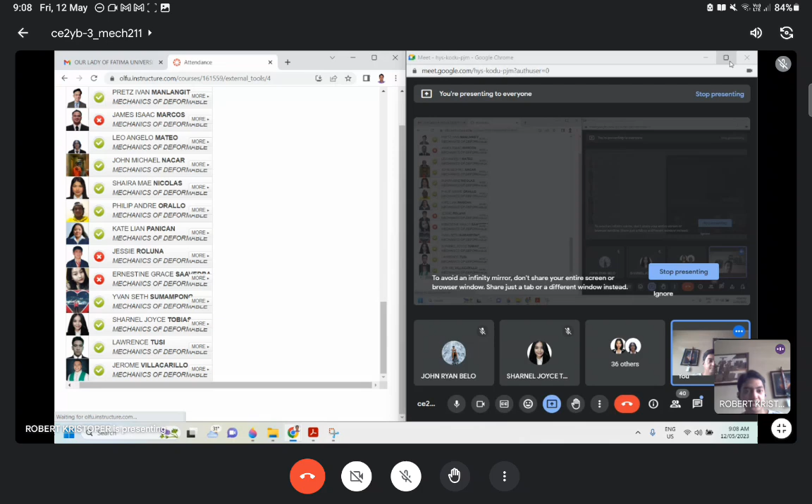Now somebody's asking me sa GC if merong points for the engineering week. What do you think? Wala po na lang, no? Actually I'm thinking about it kasi yung iba kong co-faculty naman is acknowledging the participation, giving some points. But again, with your participation, it does not necessarily mean na you're automatically pass the course. It's just maybe a point of addition to some low scoring activity. But again, there's no assurance - pag umattend kayo doon, you're already sure pass the course, di ba? So sige, I can give some points, but I'm still finalizing it, sa lahat naman ng courses ko yung mag-a-apply, lahat ng hawak ko na subject. So wala pang hindi ko pa pina-finalize kung ano man yung points, kung ilan or saan. But rest assured, if you join, meron din sa akin na additional points. The purpose naman is to somehow loosen up - hindi lang puro aral, somehow you can enjoy your stay sa school with that activity. Yun naman yung main purpose. But sige, since most of you are requesting for that, then I can give it naman.

Okay, so let's proceed with our agenda for today, yung ating discussion. Can you confirm, class, you are seeing my presentation here? Yes po, sir. Okay, I would like you to bring out your calculator already. And also listen very carefully, and kung merong question, feel free to ask kung nalilito kayo.

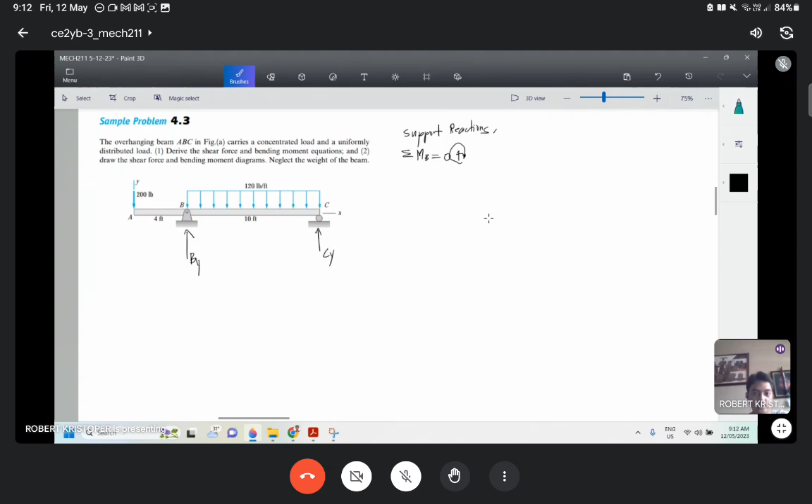Summation ng moment about point B, equals zero, positive clockwise for our equilibrium equation. So negative 200 times the moment arm of 4 feet, negative because it's counterclockwise about point B. Then negative Cy multiplied by the moment arm of 10 feet. And of course, the uniformly distributed load, plus the area.

That area is just the magnitude of our uniform loading, so that is 10 times 120 pounds per feet, the base times the magnitude. That's only the magnitude of the force. When we take the single concentrated load, the resultant of 120 pounds per feet, it will act at the center of this rectangle figure, so our moment arm will be 10 over 2, or 5.

Again, this area is the magnitude of this concentrated load, and this is the moment arm, 10 over 2, which is the location of the resultant of this uniform load. So equals to zero.

Can you give me the reaction at support C? You can speak right away. So, how much is this? 520 po.

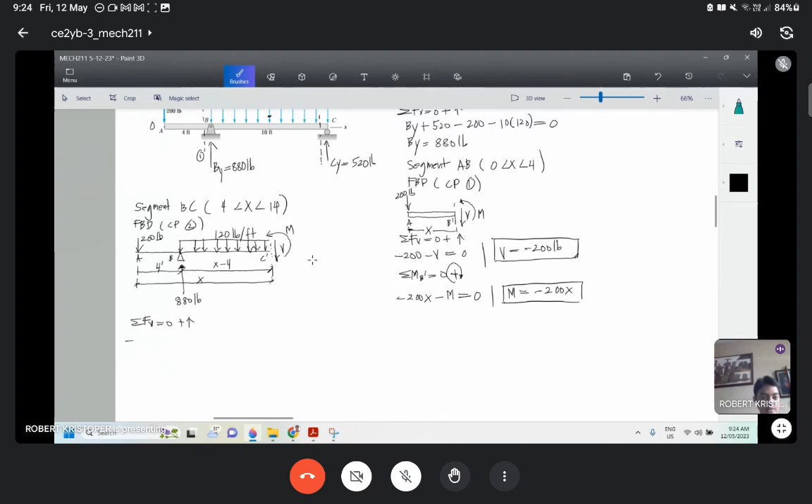Going upward is the reaction of 880. Going downward is this 120 pounds per foot. So minus, of course, the area of our uniform load. The area will be base times height, which is the magnitude of the uniformly distributed loading. So that will be minus, our base is x minus 4, times height, which is the magnitude of 120.

Is there anything else? Summation of forces: 200, positive 880, then the uniform loading, then of course this shear. So going downward is our shear V, shear force V. Forget, so minus V is equal to 0.

Now we need to simplify our equation so it's easy to use. So let's transpose this V to the left side, so it becomes positive. It is equal to this expression. Let's simplify: negative 200 plus 880, how much is that? Positive 600.

Positive 680, right? Then let's distribute this. So that will be what? Negative 120 times x is negative 120x. And then 120 times negative 4 is negative 480. Is that right? That's 480, so negative 480. Wait, negative 4 times 120 is negative 480, multiplied by the negative sign, so it becomes positive 480.

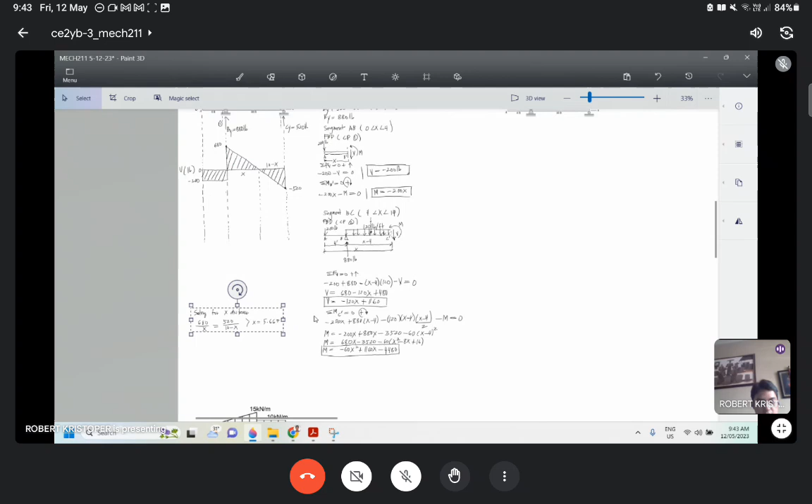Okay, so good. Now, after solving distance for x, then we are already ready to apply or use the moment equation. Okay, ibaba ko lang dito muna, mamaya ko na lang i-start yung solution. Okay, ano yung moment equation for segment AB muna? So unahin natin tong segment na to.

Okay, for the moment diagram, again, let's draw a horizontal line for the datum value of 0. So this is moment diagram, the unit is pounds feet, right? Now, do we have a moment loading here? Kung merong moment loading niya, let's say clockwise 20 pounds per feet, so positive yun, ang drawing natin pataas, di ba? 20 pounds per feet. Wala naman tayong loading or any reaction, so wala.

Okay, now mag-refer lang tayo sa ating equation. So ano equation? Negative 200x. Now class, for segment AB, kung yung value ng x is 0, syempre, di ba yung limit is 0 to 4. If x is 0, negative 200 times 0 is 0, so 0 lang yan, lagay lang natin dito 0. Then, of course, if x is equal to 4, then that will be negative 200 times 4 is negative 800. So negative 800, okay, ibaba natin dito.

Okay, so let's say this is negative 800. Now, at 0 degree, of course our first degree is straight, that's always 1. So if that's 0 degree, that's 1, so first degree ito sa baba. Okay, and that's for this segment.

Okay, let's check on our module, in case na may mag-review sa module. I just want to reiterate this one. Nasa na ba yun? Okay, if you will be reviewing on your module, ito yun. Saan na ba yun? Yes, ito yun. So ito yung ating parehas lang with our computation, kung mapapansin nyo.

Ito ba yun? Wait. Yes, ito. But what happened? Negative 800. Class, may mali ba ako na-isulat kanina with our... Tama ba yung nasulat ko dito? Can you check, sa dinictate ninyo? Using the shear equation, the moment equation.

Double check niya. Kapag ang value ng x is, ang tawag dito, what did I tell you? Ang value ng x is 5.667, or supposedly dapat yun ay 9.667. Ano sinabi ko kanina? Plus, what did I tell you kanina? 5.667. Okay, so that is our error, no? My bad. Kasi ang reference natin ng equation dito, ang reference natin ng 0 is from point A. So we all know this value of x is 5.667. So we need to add 4 here so that yung ating value ng x should be coming always from the 0 origin.

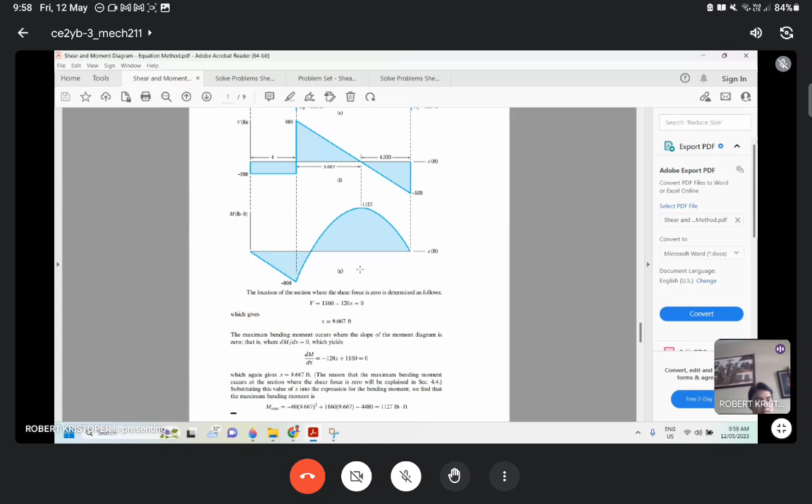Now, what do I want to emphasize here? On the equation, what's it called? On the solution of our module, we change the computation, not the equation. It so happened that using the equilibrium equation, the assumption is counterclockwise positive, but ours is clockwise.

But if you notice class, let's go back to one equation. Let's compare. This is his method, counterclockwise positive, this is the moment equation. Let's go to what I did. The moment equation is still similar. Either you assume the summation of moment is positive clockwise or positive counterclockwise, you will come up with the same moment and shear equation.

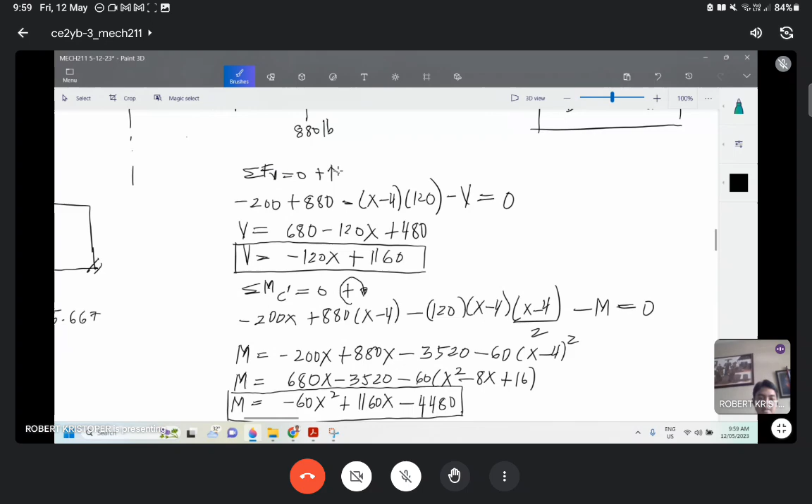For the shear equation, it's the same, positive upward is the positive direction. That's what I wanted to emphasize, but that is our method.

Now, let's do the much easier method for drawing the shear and moment diagram for the beam. That is the area method. This is faster, so let's speed up solving this.

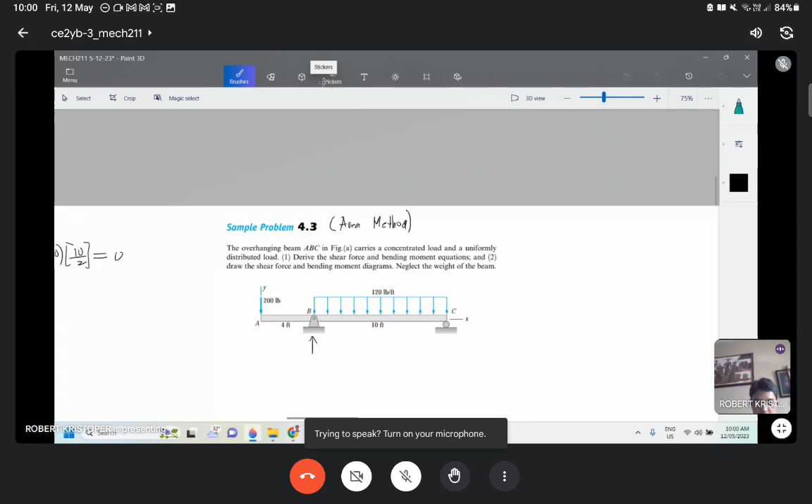Area method. I'll just add the reaction since we already solved that earlier. So that will be 880 and 520 pounds. Now upon solving the reaction, you can already proceed with drawing the shear and moment diagram.

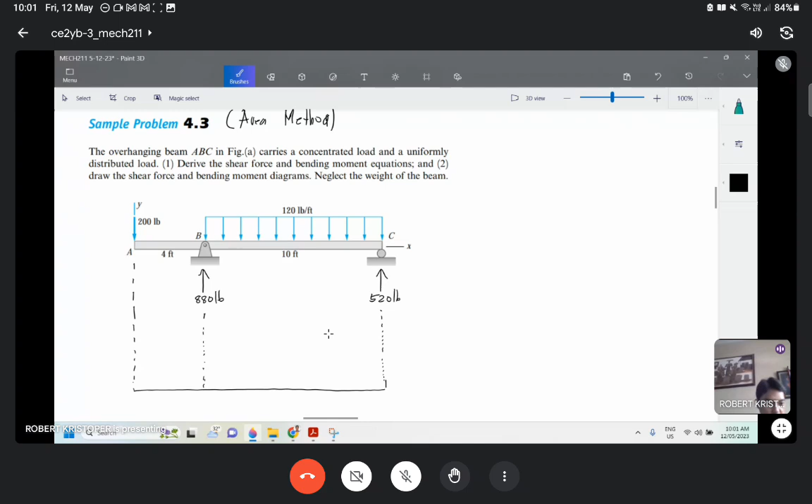So of course, how is this drawn? 200 pounds means downward, so negative 200. Just follow the drawing. Then we have no other loading here, so it's continuous until just prior to point B.

Now, we're still at negative 200 here. Then we have a force upward for the reaction. So negative 200 plus 880, that is positive 680. So we go up here by positive 680.

Quickly now, positive 680 minus 10 times 120. How much is that class? 680 minus 10 times 120, can anyone give me that? Negative 520, sir. Okay, negative 520.

So approximately, let's say negative 520. Again, this is the shear diagram, unit is pounds. So if negative 520, this is a zero degree curve, so this is first degree, straight line when we connect the values.

So negative 520, then of course we have a reaction going upward, positive. So negative 520 plus 520, that goes back to 0. So this is our shear diagram.

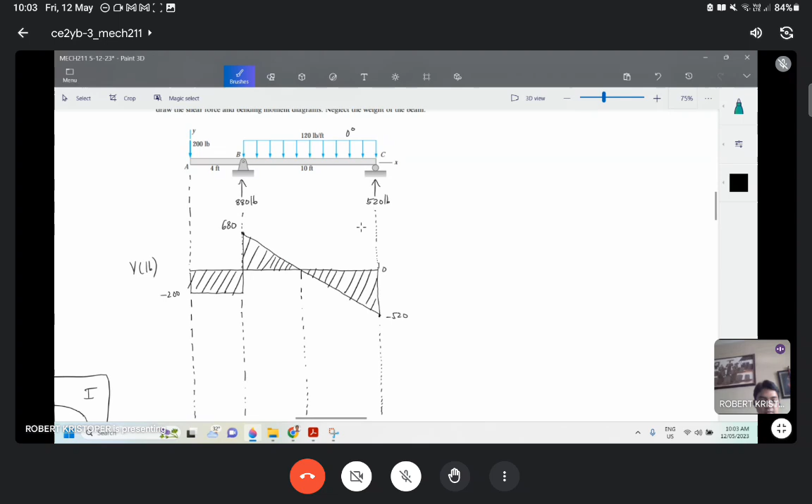For the moment diagram, let's continue. So, drawing again our boundary lines on our graph. Again, this is for the moment diagram. So M, the unit is pounds-feet. And again, our reference for the horizontal datum is 0.

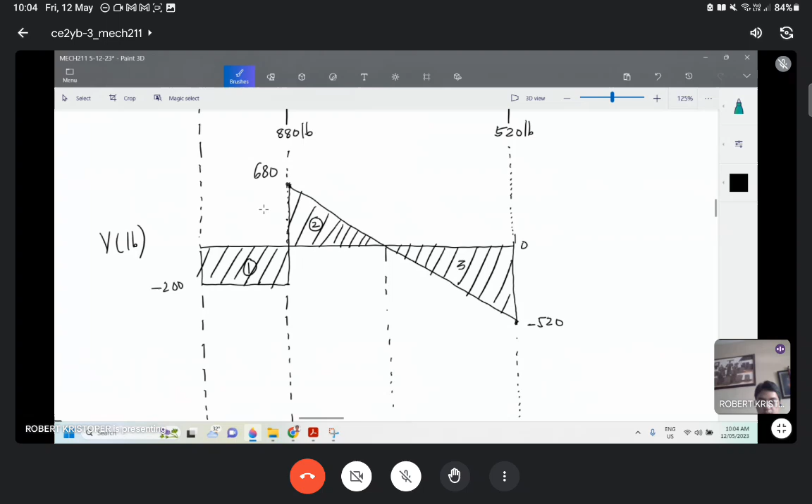Now, we have no other loading, no moment loading, so there's no addition per segment boundary. So we just need the areas. Let's say area 1, area 2, then this is area number 3. Let's complete the areas.

So area 1, what area is that? Area 1 equals base times height. What's our base here? 4 feet is the dimension. So 4 times 200. Let me put the sign so we can continue adding later. So A1 is simply 200 times 4, that's 800, negative.

And area number 2, since I won't solve this again, this distance we already computed earlier by applying similar triangle, that is 9 point... x computed earlier for this one is 5.667, right.

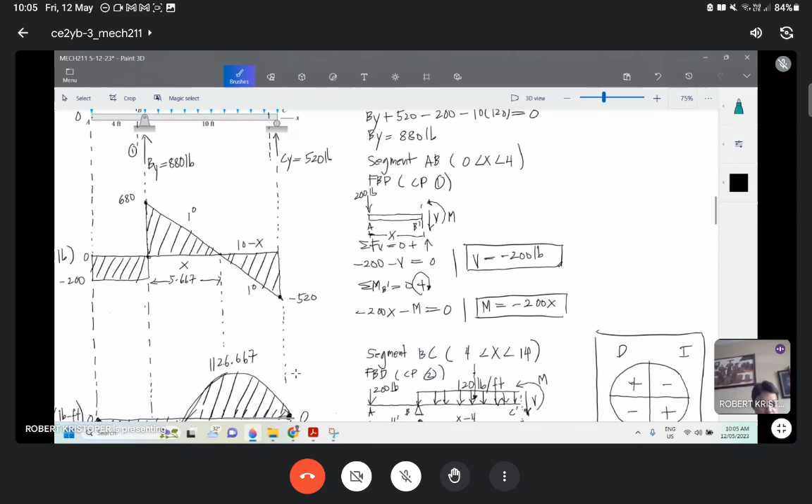So, 5.667, tama ba? Yes, 5.667. Let me review this, class. Again, let's pick this view. Mahirap mag-set ng screen view dito sa online class. So, 5.667.

Itong kabila, ilan to? Siyempre, 10 minus 5.667, that is 4.333. Now, for area 2, itong triangle, positive na.

1/2 base, 5.667 times the height ng magnitude na 680. Ilan to class? Anyone?

For area 2, nang pakibigyan na lang. Yung area 2 po ba? Area 2. 1126.78 po lumalabas. Ay, hindi sir, wait lang po, minus ko na pala agad. 1926.78. Okay lang na, 78.

Now, for area 3. Ang ginawa niya is kino-compute niya na ng tuloy-tuloy. So medyo advanced na yung nagpa-participate. Sino nagpa-participate na? That's good for you.

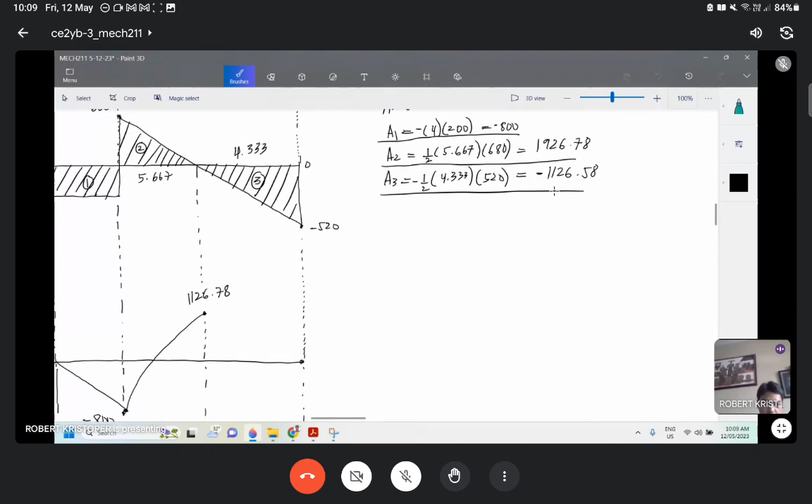And of course, finally, 1126.78 minus 1126.58, meron tayong konting discrepancy. Okay? So, but it will go back to approximately 0. No? 4.333 times 520, so meron tayong discrepancy. That's on the rounding up. So, pero close to 0, approximately 0.

Okay, don't worry as long as tama yung procedure na computation. I'm also considering yung mga minimal discrepancy pagdating ng final closing ng inyong shear and moment diagram. Okay, so this is the shear and moment diagram. Then we can already finalize, no? Therefore, the maximum moment is 1126.78 pound-feet, and the maximum shear is positive 680 pounds.

Okay, so I guess same lang ng ating shear and moment diagram, no? Same result, okay, with different method. So happened that naka-equation kasi tayo dito, so somehow merong magiging variances talaga in our computation. Pero sobrang close yan, sobrang malapit.

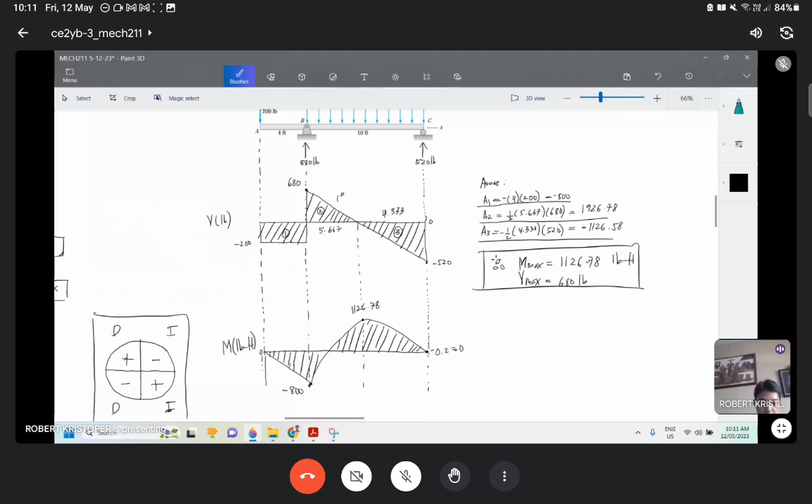Okay, so let me just put a first degree curve and a second degree curve here. So again, nadadagdagan ng class na from the loading 0 degree plus 1, magiging first degree sa shear, then magiging second degree sa ating moment diagram. Okay, so that's it for our first example.

And okay, I'm thinking if we need to show this one to you, or we need to solve this one in detail. Okay, pwede natin skip dito yung equation method, I guess.

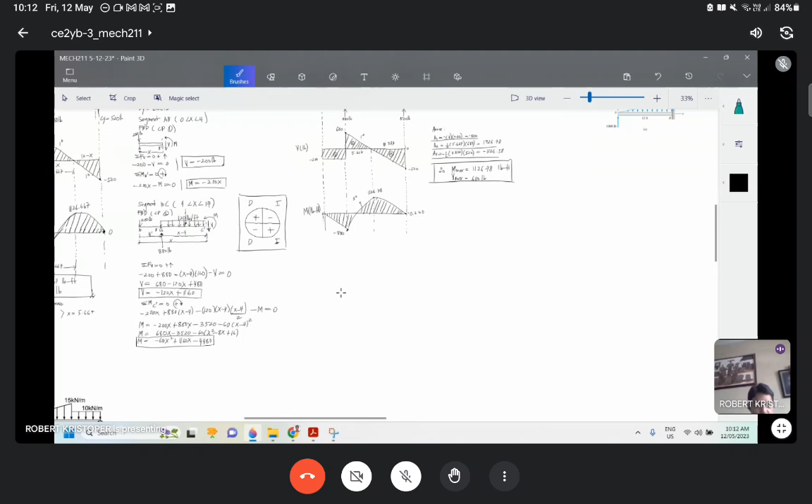Then we will proceed with this one for both equation and area method para meron tayong mga ganitong example for you, no, kasi yun lang naman yung mga complicated loadings, no? Sige, what do we do? Okay, sige, gawin natin, kasi meron naman to sa module new class, no? I-discuss ko na lang muna equation method here. Nasa mo yan? Okay, then we do the area method, okay? For that example. Para makapag-moving load agad tayo, no?

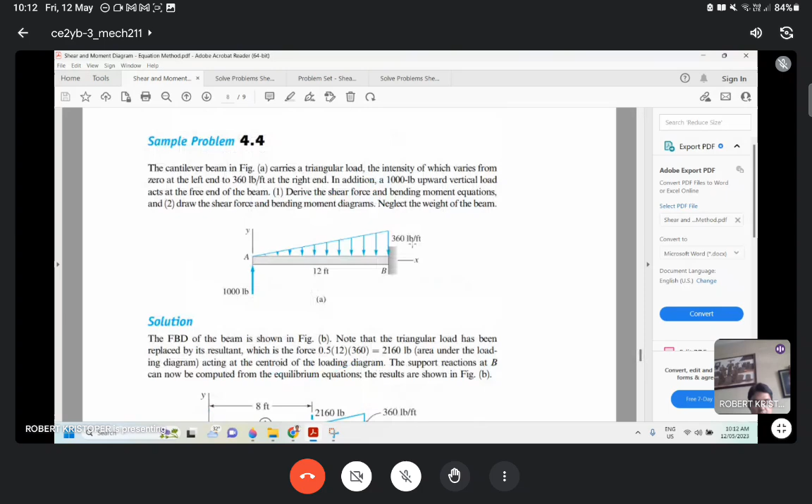Class, are you with me with this one? Sample problem 4.4. Class, are you with me with sample problem 4.4 already? Yes sir. Okay, so what we have here is a cantilever beam.

So if it's a cantilever, it's free at the end with no support, and there's a fixed support. When we say fixed support or rigid support at the end, we have three reactions: vertical reaction, horizontal reaction if there are horizontal forces, and a moment.

This force of 1,000 pounds is not just a reaction, it's an additional loading. There's an additional point load at the end of the beam or at the free end of the cantilever beam. It carries a triangular load with magnitude varying from 0 to 360 pounds per feet.

And in addition, there's a 1000 pounds vertical load at the free end of the beam. So we need to derive the shear force and bending moment equations, and draw the shear force and bending moment diagrams, neglecting the weight of the beam.

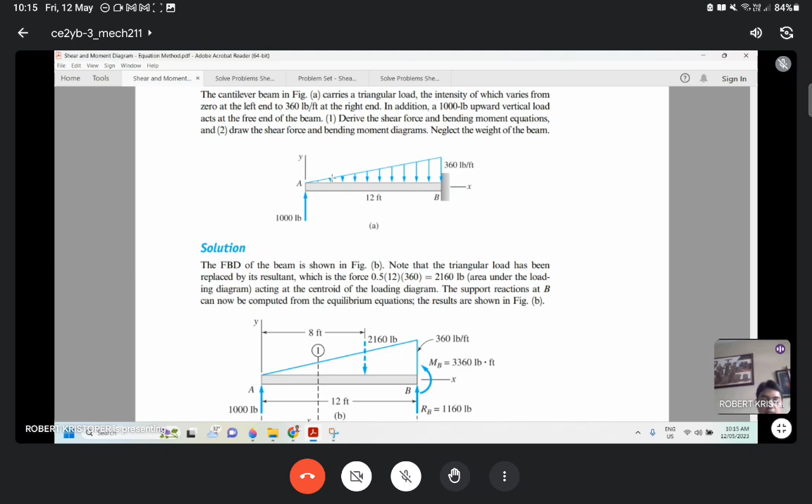What do we do? We impose segments. But here, we don't need to segment because within this span, the loading is continuous with no discontinuity. So that's what we'll see within AB - we won't have additional segments.

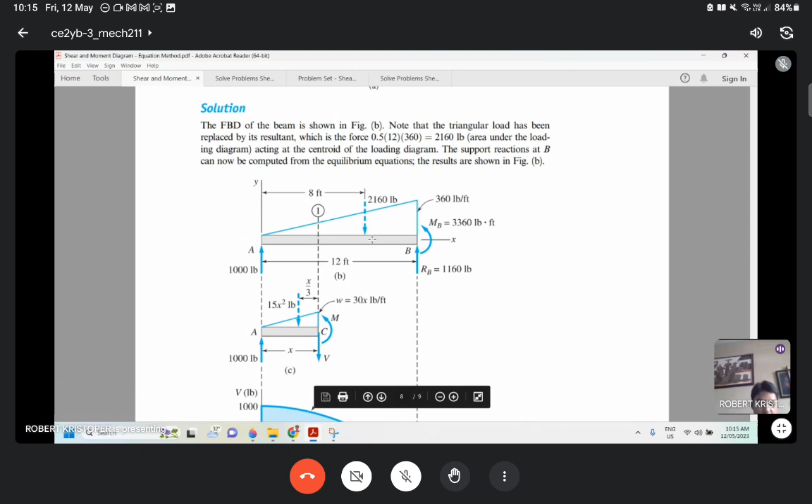So with cutting plane 1, what do we see? Again, the same thing - the shear and the moment. The shear is in the positive direction and the moment is in the positive direction - the beam is smiling.

Class, how do we come up with the equation? After getting the cutting plane, we see the shear and moment. We need to represent the distance from the origin to the cutting plane as distance x. Now class, with this triangular loading from 0 to this point, we don't know what this magnitude is - we know the total is 360 pounds per feet.

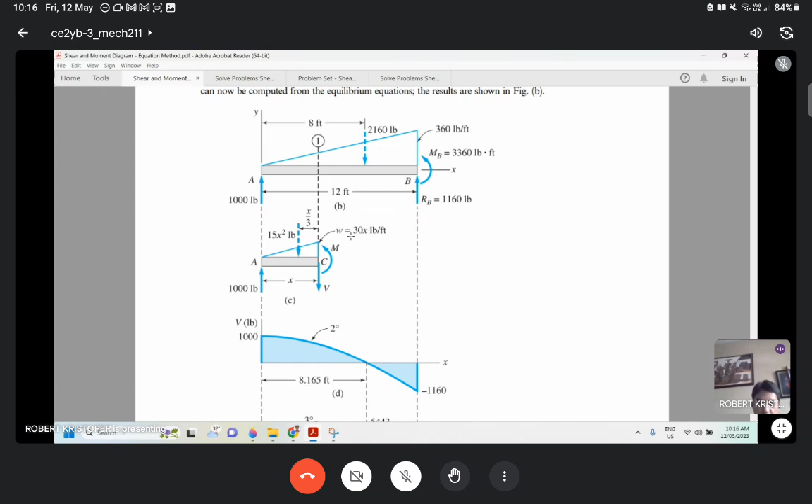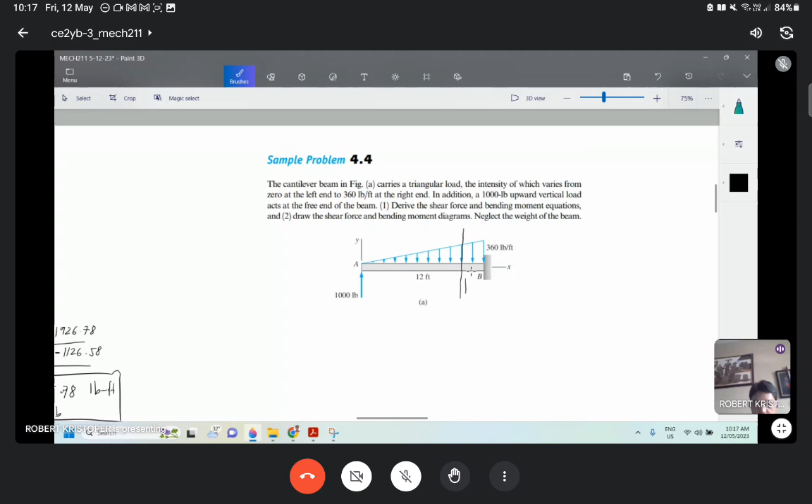So here it is, class. Upon the cutting plane - let's say that cutting plane from earlier - of course you'll see shear and moment, and distance x.

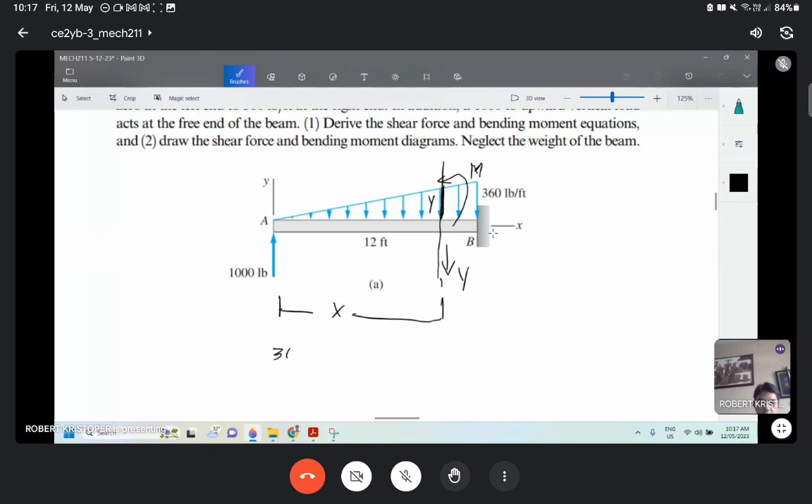Now class, at this point we don't know the magnitude of the uniform loading, so let's represent it as y. Using similar triangles, we can relate that in terms of distance x. So the total triangular loading, 360, divided by the side distance of 12, equals y - that's the magnitude of the uniform loading at this cutting plane, all over x.

So what you get is y equals 360 over 12, times x. 360 over 12 is 30. That's why, as you can see, the magnitude was 30x earlier. That's simply the uniform loading magnitude at this point, in terms of the equation 30x.

Okay, so going back to the solution in your module.

Okay, 30x siya makikita nyo. And plus, syempre, if you are to represent a single unit load for this triangle, di ba? Area lang naman yun no? Ng triangular loading, that is 1/2 base x times this magnitude. So 1/2 x times 30x, it will give you what? 1/2 ng 30x, that is 15x times x, so x squared. So 15x squared yung single unit load na yun. And it is acting, of course, at the center of the triangle, which is x over 3 on this side and 2/3 ng x naman on this left side.

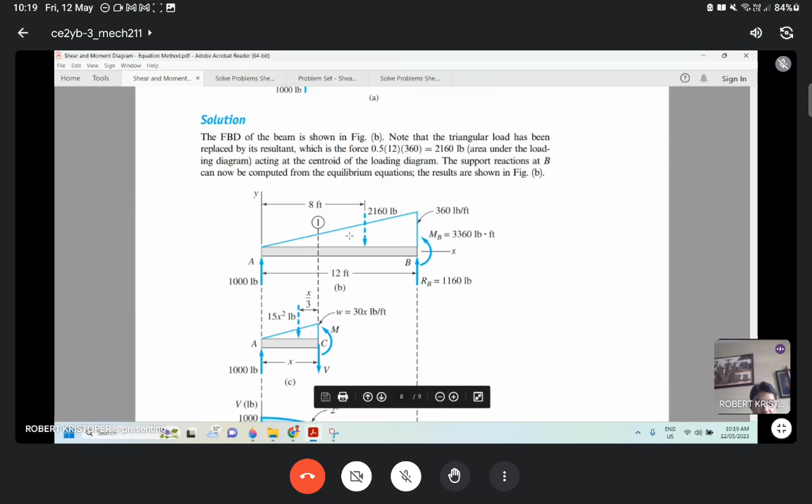Okay, but since we are taking a moment here, then ito yung kukunin natin ng moment. So after that class, you will be coming up on this equation for shear and moment. Isa lang yan kasi isang segment lang.

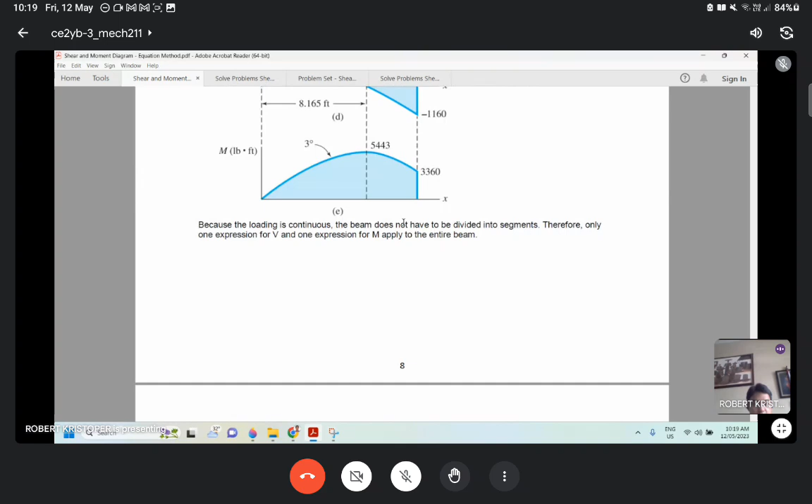Okay, so for the shear, nag-sum up lang, no? 1,000 yung end load, yung load sa dulo, no? And also this unit load here, yung resultant ng triangular loading. Okay, and what else? For the moment equation, take na kayo ng moment at this point, yung cutting point. So 1,000x yun, and then 15x squared multiplied by x all over 3.

So simplifying those equation, makukuha nyo pa rin yung moment equation na to. And again, same method lang to draw the moment diagram, then apply nyo lang yung ginawa natin kanina. Magbigay kayo ng value ng x on our shear and moment equation, and until maplot ninyo yung complete diagram.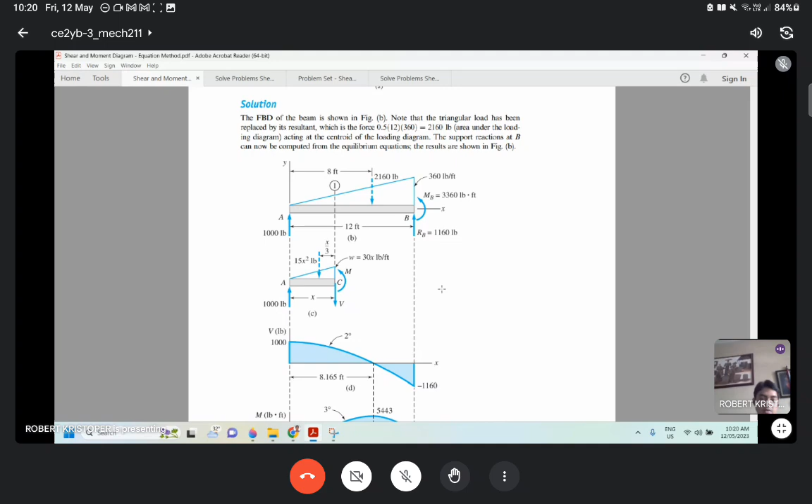So, the difference is that, class, dito yung solution na you just need to review. The difference lang on this method is that yung moment equation is positive counterclockwise on the equilibrium equation sa module, pero sa atin is positive clockwise. But still, that will yield to same shear and moment equation naman. Okay, so i-recheck natin itong value na itong graph na to and yung mga values using area method naman.

Okay, so yun na lang yung solve natin with this one. Now, burahin na natin to, dito na lang mag-drawing sa kabila. Okay, applying area method now for this problem. Class, are you with me with this sample problem 4.4 using area method naman?

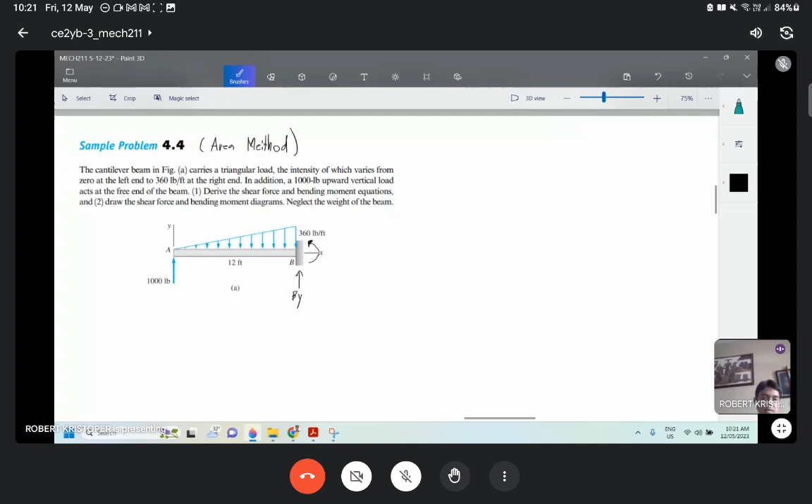Okay, so area method, again, with the rigid support or fixed support at the end. Okay, anong reaction na meron tayo? A vertical reaction, may horizontal reaction yan supposedly, pero zero yan since walang force horizontal. So B sub y lang to. And of course, we have a moment reaction at the end support. So again, assume direction lang to. Okay, so M sub B.

Now, let's compute support reaction. Okay, summation ng forces vertical equals 0, positive going upward. So that will be By, okay, plus itong loading na upward 1,000 pounds minus, of course, okay, itong triangular load. So the magnitude, the single unit load will act at this point, approximately, sa center ng triangle. But yung magnitude nito is, of course, the area, which is minus 1/2 times base 12

times 360. Again, this is just the magnitude. With this one, yung area, we need to multiply by, okay, we're taking summation of forces pala. Natin kailangan ng moment. So summation of forces, By plus 1,000 minus 1/2 times 12 times 360. Okay, is equal to 0. So By is equal to, ilan to class?

Go ahead, kung may na-complete na. Ilan to? Anyone? Go ahead, ilan? 1160. 1160. Okay, so By is 1160. And then, of course, ano yung unit natin dito? Pounds and feet, so pounds.

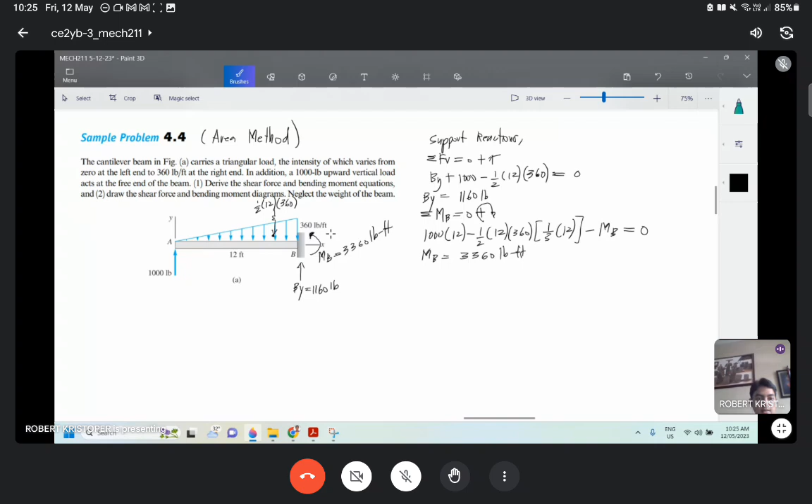Okay, so now with this one, we are ready to compute and draw the shear and moment diagram using the area method. With that, how do we do it? There's only one continuous loading in this span, so we don't need to increase the segments for discontinuity. Let's just drop down the span.

Okay, then again, this is for the shear. Unit is pounds. Okay, 0 for our reference datum. Now, do we have any shear here, or any force? Yes, 1,000 pounds, going upward. This is 1,000.

And of course, there's the area of the triangle. So, 2,160 of course downward due to the loading, minus that from our loading. So, 1,000 minus 1/2 times 12 times 360, how much is that?

Anyone, how much? Negative 1160, sir. Okay, negative 1160, that's correct. So, negative 1160. And of course, that will return to 0. Negative 1160 plus going upward, 1160, so it will return to 0.

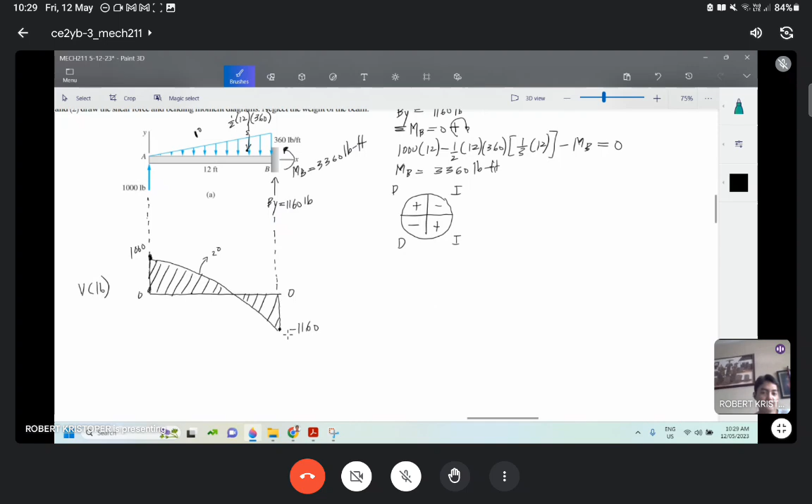So this will be first degree, and obviously this will be a second degree curve or a parabolic curve. Okay, let's shade it to emphasize the boundary of the area. Okay, now this is the area we will reference for drawing our moment diagram.

Okay, so with that, let's add labels. Now, this is area 1, area 2. Now, how can we compute for area 1 and area 2? We need the distances, because we have a discontinuity or a segment here. So what is the value of this x? Of course, if you set the value of x, the other side would be 12 minus x, right?

So how can we resolve this? If it's second degree, we have a parabolic curve - a parabola is a second degree curve. With that, we can apply what we call the square property of a parabola. What's the formula of a parabola? x squared equals 4ay. And if the axis is on the other side, y squared equals 4ax. What parabola do we have here? This is the half portion of the parabola, and supposedly if you complete it, the other half is on the other side.

So we have here the apex, the point where inflection occurs - the point of inflection, mixing up engineering economy and mechanics terms - where there's zero slope, we have zero magnitude for our loading. So that's our parabolic curve, and this is our axis of symmetry. That's why our equation has x squared - applying the square property of the parabola. How do we apply this to solve for x? It's similar to ratio and proportion in a triangle, using similar triangles, but this time we consider the whole parabola.

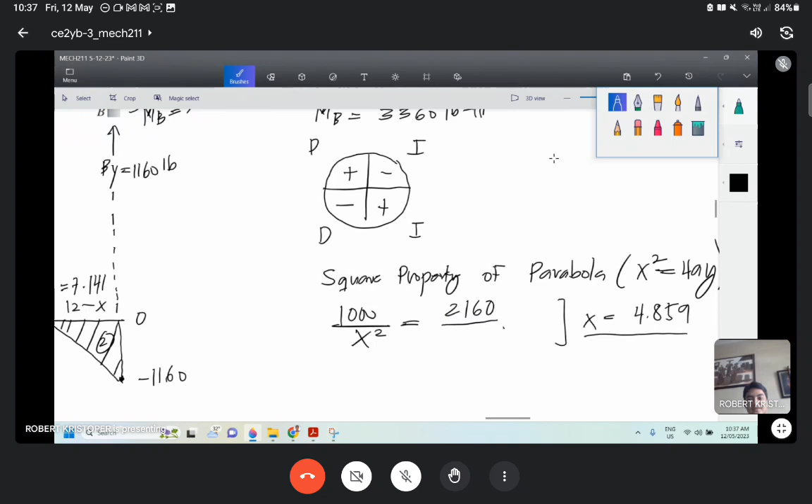Okay, ito yung naging mali ko pala, class. Kindly, okay, ito siya. Inassume ko siyang triangle, my bad. Okay class, ito siya, tapos sa triangle dito. Okay, ito siya. No, this should be 12.

Kasi we are referencing at this point as the origin. So yung ating distance from this axis of symmetry is, of course, x for this one. Then 1,000 yung ating magnitude, then 2,160 for the total. Then yung x distance, this should be 12, no? Then, of course, we square this one.

Can you give me the value of x nga? Napasarap sa triangle. Ilan na yung value ng x here? X. Yan. Okay, can you give me the value of x here?

Kapag ito na equation, 1,000 squared. 1,000 all over x squared is equal to 2,160 all over 12 squared. Kailan na ito, class? Can you compute? This should be around 8 point something. 8.165. Okay, so tama na to this time around.

Napasarap sa triangle na. Okay, for the parabola we have to consider the whole curvature na on our equation. Okay, so 8.165. Okay, so kaya pala hindi siya nakaano sa ating... ang tawag dito, hindi siya proportional. Okay, so 8.165. Okay, x is equal to... wala.

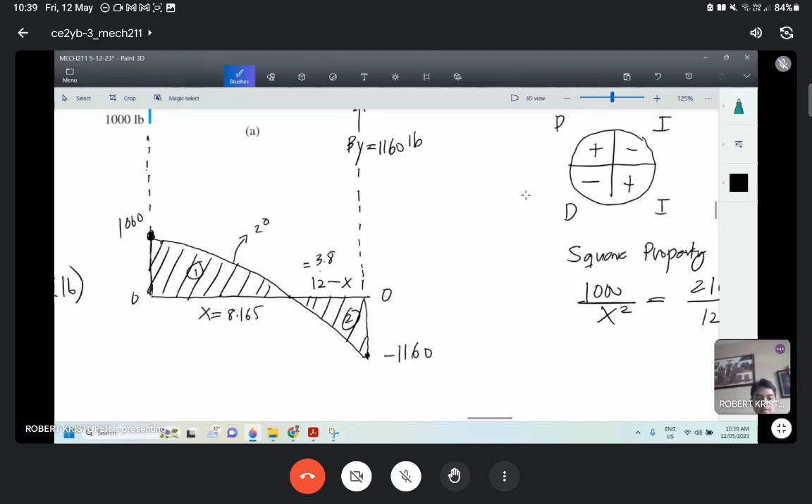So 8.165. Now, of course, 12 minus x, that will be 3.835. So this will be 3.835 for the distance. Now, we are ready to solve the areas.

For the areas, how can we do it? Ano yung formula ng spandrel? That's 1 all over n plus 1, where n is the degree, then base times height. Okay, so what do we have here? Areas.

Okay, for area number 1, di ba we all know that this portion ng area... lagyan ko lang ng almost hidden line. So di ba with this one, ito yung area ng rectangle, ng kabuuan. So that area minus this area ng unshaded region is equal to this area 1.

Okay, so with that, can I write this one sa official equation? That will be what? Area ng rectangle ng kabuuan, that will be base 8.165 multiplied by the magnitude nito, which is 1,000.

Minus itong area ng unshaded region. Ang ating unshaded region is spandrel, second degree spandrel. At dahil second degree yan, ang ating factor is 1 all over n plus 1, so add tayo ng isa, 1/3. So 1/3 base, ano yung base natin? Yun pa rin naman, yung 8.165, times height na 1,000.

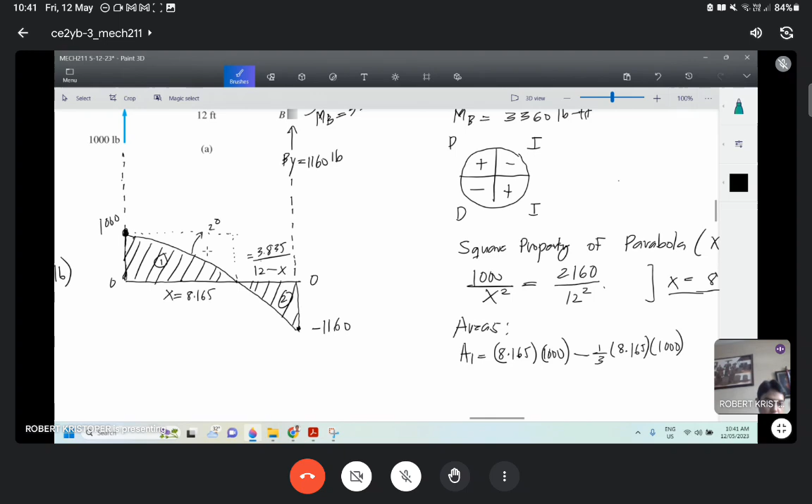For the other way around, kung alam niyo 1/3 tong portion na to, edi itong kabilang side is 2/3. So area 1 is 2/3 base times height lang. So that's the other way around.

Pero just to emphasize our solution, ginawa ko na ganito. Ilan yung class? 8.165 times 1,000 minus 1/3 ng 8.165 times 1,000. Ilan to class? 5,000? Parehas lang ba? 5,443.33. Same lang?

Yung na-complete na. Same? Can you confirm before I proceed? Guys, can you confirm? Same? Yes po, same lang po. Okay, so now this is for area 1.

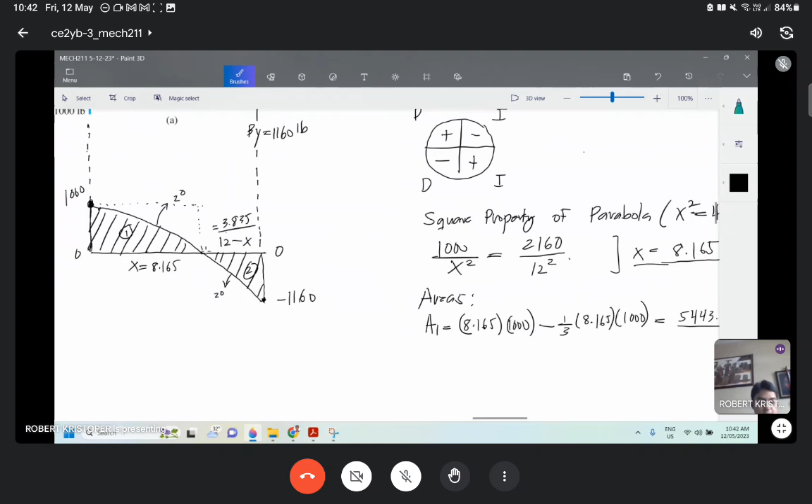Then how do we solve area number 2 naman? For area number 2 class, we cannot apply, kasi parang, is this a spandrel naman? Then we can just simply apply yung formula na 1/3 base times height. But in this case, hindi siya applicable, since this is not the apex of our parabola or our curve. So we cannot apply that equation in particular. Hindi rin yun yung magiging apex on our parabola.

Okay, hindi natin siya ma-apply yung area na yon. Ang kailangan natin gawin is that we consider this whole parabolic segment in order to compute for area number 2. So syempre i-isolate natin itong buong parabola. I-isolate ko muna yan.

Okay, so this is 1,000. This is 1,160. Okay, ito siya class. If we consider the whole parabola, then we can consider a full rectangle, isang malaking rectangle. Anong dimension ng malaking rectangle? Of course, that will be ito ay 12. At itong kabuuan na to is in total, that is 2,160.

Okay, now again this is area 1, computed kanina, meron naman tayong value na. Then area 2 is unknown. In order for us to compute for area 2, ang pwede natin gawing consideration dito is itong area ng kabuuan ng rectangle, itong kabuuan, minus itong area na to.

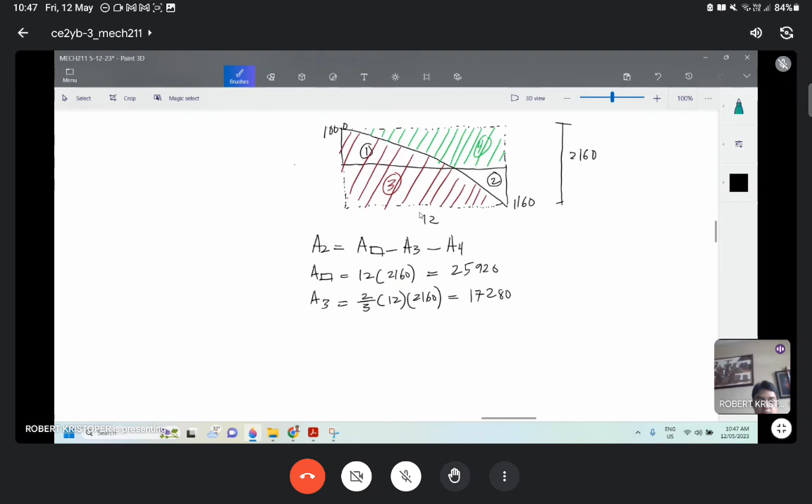Ilan to class? 17,280. Parehas, no? Parehas lang, so nung na-compute ko din. So area 3, anong ulang na lang? Area 4 na lang. So area 4 will be, paano ito makukuha class? Diba, we all know that area 1 kanina, computed naman natin kanina. Area 1 is 5443.33. So kailangan lang natin i-minus ng area 1 sa kabuuan nitong upper rectangle. Within yung upper rectangle, ang dimension is 1,000 by 12.

So that will be area 4 is 1,000 times 12 minus area 1. Ano yung area 1? 5443.333. Ilan to class, for area sub 4? 1,000 times 12 minus 5443.333. 6556.667.

Now we are ready to substitute the values. So area ng malaking rectangle is 25,920 minus 17,280 for area sub 3, minus 6556.667. So ilan to? 2,083.333. Go ahead if you have the answer.

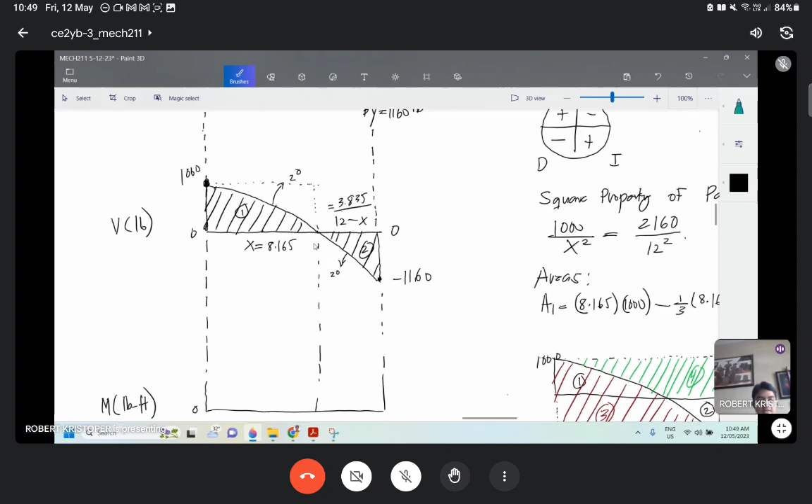So for area 1, what do we have? What is the magnitude? It is 5,443.33. So the moment at this point is 5,443.333. Now, what does our graph look like? Is it like this or like that? Again, we have no moment loading at the top, so it's zero here.

How do we draw that? Is it like this or like that? Let's refer to the DT. Again, this is positive for the graph, since it's above the horizontal line. So positive, and this is decreasing. So decreasing positively, decreasing positively. Okay, that's it.

5,443.333. So for area sub 2, this is negative, so we need to subtract this magnitude. Or if you want, under the solution, put it in parenthesis to indicate a negative value for the area. So it's still negative. 5,443.333 minus 2,083.33, how much is the class? 3,360. Okay, correct, 3,360.

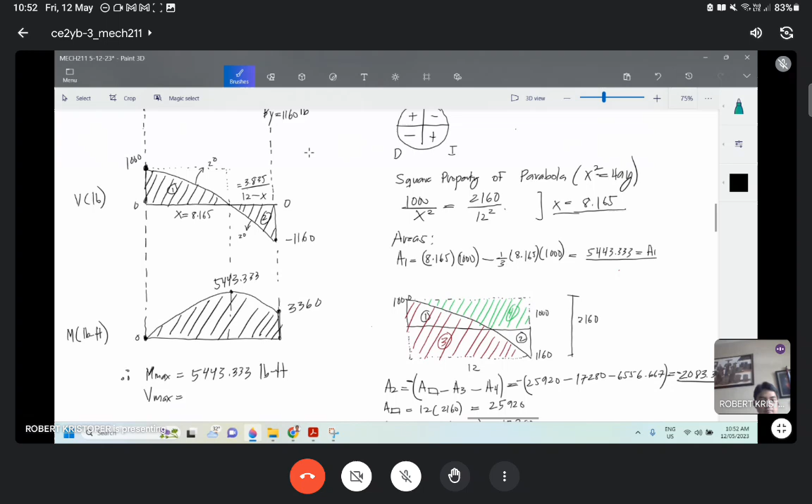Now, therefore, the maximum moment is 5,443.333 pound-feet units. And the maximum shear is, what do we have here? Negative 1,160 pounds is the maximum.

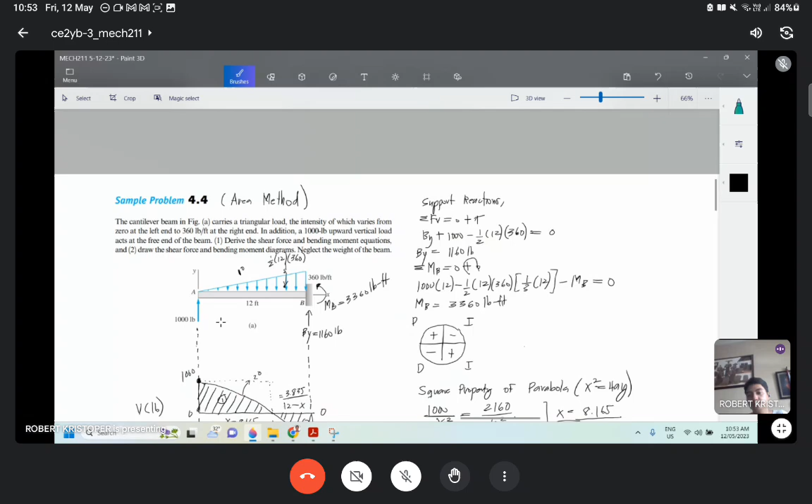So can we check this result against the equation method in the module? I think it's the same. Yesterday's value was 5,443. Same result. So the maximum shear is negative 1,160. Same with the result using the equation method. This is also called the area method. Okay, let's save this one.

Okay, supposedly class, I still have another one to discuss, also called by another name, as an example before we proceed to moving loads. But I think we need to go to moving loads already. What I will do is just send you the solution for this one, both equation and area method, so you'll have an additional example. But basically you have your module with a lot of solved problems. If you want to check, there are solved problems there.

Okay, in your module, just take time to review. But of course, it's not just review — I encourage you to solve it on your own and then verify the result here. And again, in your module, the difference might be in our assumption of positive and negative direction for the equilibrium equation, the summation of moments. That's the only difference, but the rest are all similar. You saw the cutting plane, the assumption there is similar to our positive direction. Positive moment when the beam smiles, positive when it rotates clockwise. Kindly check all those examples.

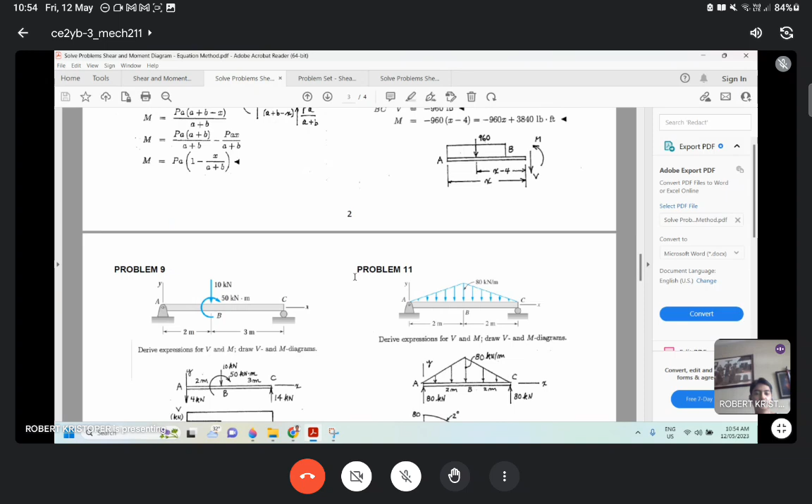Okay, other than this example that I will be sending to you, so we can proceed with the moving load topic already. As long as you know the concept, you won't get lost with the procedure. Now class, before we proceed to the moving load topic, let me show you some example here.

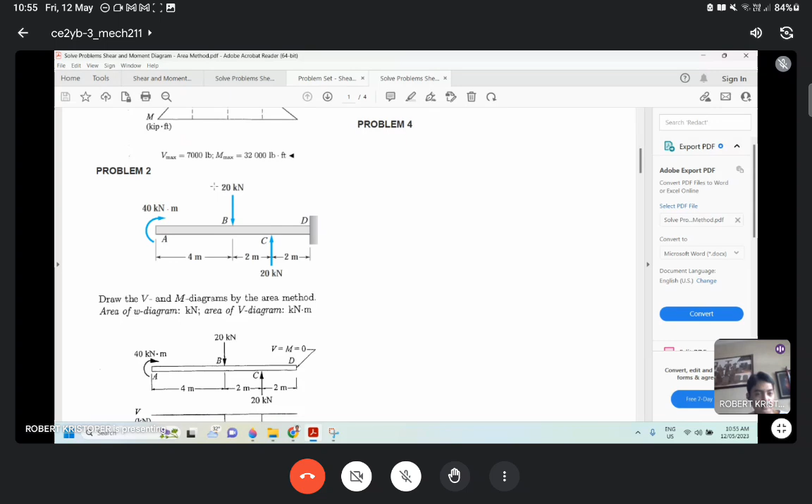Class, are you with me with this problem number 2 on your screen? Yes po. Okay, so this is actually a solved problem using the area method. Again, you have to solve the equation for the reactions, then you can draw the diagram. So for the shear here, if you notice, do we have a force here at this end segment?

Wala naman, di ba? So flat pa yan until this point B. Ngayon, bigla nagkaroon loading na 20, so bumaba ng negative 20. Then until prior point C, negative 20 pa rin yan. But pagdating ng point C, meron tayong support reaction na 20, so balik sa 0, negative 20.

Now for the moment diagram, kung mapapansin nyo class, if there is no loading na moment on our beam, then lagi nagsisimula naman sa 0. But in this case, if meron certain value ng moment, kahit pa yung sa segment B or C or at A, what we are doing is parang point load lang, taas baba lang yan on our diagram.

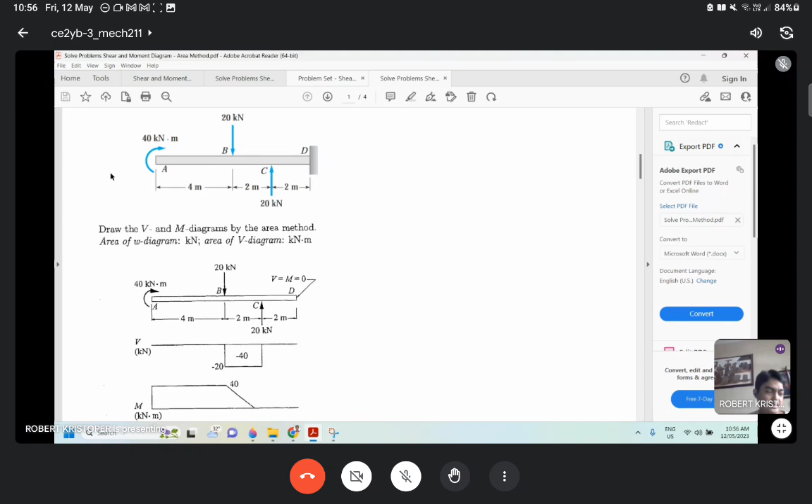So in this case, this is positive 40 kilonewton on our assumption sa equilibrium equation. Positive means clockwise means positive, that is why ito ay positive on our graph. So tumaas siya ng 40 in magnitude.

Now do you see any loading? After nyo mag-graph to, for the 40 kilonewton meter, refer to the shear diagram. Do you see any areas here that will change the magnitude of 40? Wala naman, di ba? So continuous yan until at this point.

Now at this point, at point B, 40 kilonewton meter pa yan. But of course meron tayong 20 kilonewton to change itong loading to change the moment diagram. So from 40, again, take the area ng ating shear. So 40 minus 40, it will bring back the value to 0.

Okay so 0 na yan, then are you seeing other areas here after this point? No, hindi pa nga ito pantay, dapat pantay to here. Okay so 0 yan, then until this one, 0 yan. So we don't have any area under this particular shear diagram.

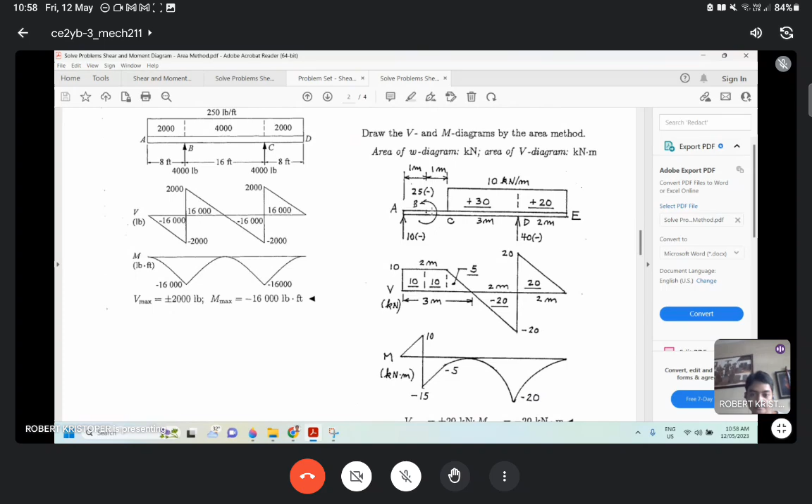So what I'm trying to emphasize is that pag nakita kayo ng moment loading, ano nangyayari? Kuha pa tayo ng example dito. Here with this one, may moment loading here, or there's a couple of loading. Anong nangyayari dito? We have a 25 kilonewton meter.

Now for the moment diagram, the area of this one, class, are you with me muna for problem 8? Sige nga, for problem 8, are you with me? Yes problem po. Okay, so for problem number 8.

Upon solving the support reaction, mag-drawing nyo naman yung shear diagram. Then for the moment diagram, siyempre you check the loading, wala naman tayong moment here, so we just simply refer to the area ng shear.

So the area ng shear is, of course, that will be what? 10 yung magnitude, and then yung distance is 1. So 10 times 1 is 10, so that is why 10 yan. And then first degree, 0 degree pala, then first degree to, so 10.

Ngayon, we have a moment loading na 25 kilonewton meter counterclockwise. Counter means negative, so that will be what? 10, mababawasan siya ng 25. So 10 minus 25 counterclockwise, negative 15. That is why nagkaroon ng drop down here.

So kung clockwise positive, ano mangyari sa ating moment diagram? Pataas naman yun doon. Then bago nyo consider itong sunod na mga areas here.

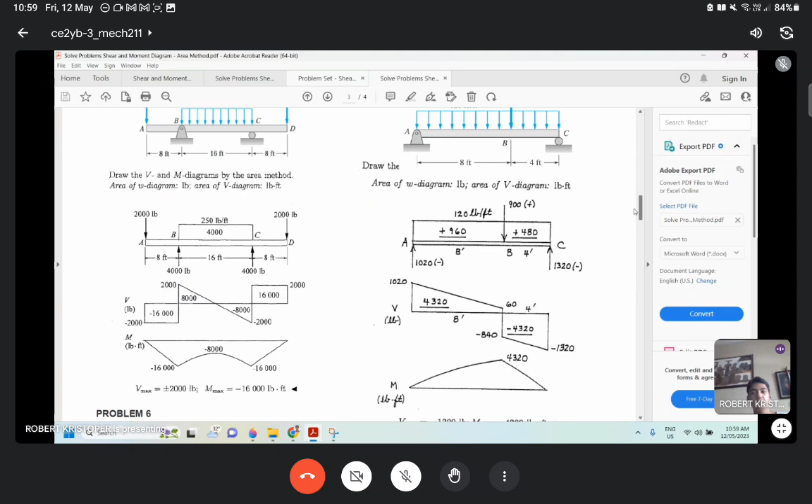Okay so class, this is it for your practice. I-check nyo yung mga sample problem here, then apply our core concept. Ang importante lang naman din, alam niyo yung core concept din.

Compute for the reaction, kung equation method yan, take the segment, complete for the draw the free body diagram, take the moment and shear equation, then plot the diagram. Wag lang kayo malito doon sa how to draw, using yung ating guide na DIDI, for positive and negative values, how can we connect the datas on our graph?

Okay, so now we are up to the last topic for the day.

For the last topic, class, this is all about moving loads. Pero we discuss this one very briefly lang, kasi ito yung madaling topic lang naman. I would say, kung masusundan ninyo yung flow ng discussion, but of course, kindly listen attentively.

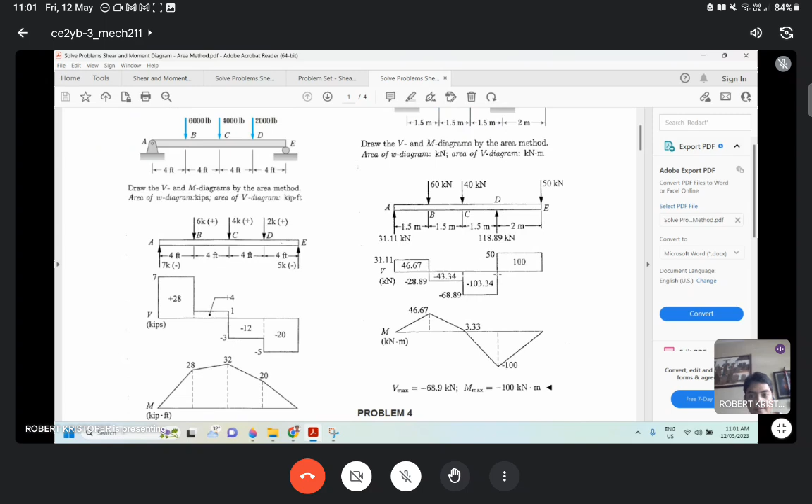Okay, mag-observe pa tayo dito. Ano pa yung may mga loading lang ng mga unit load. Okay, so meron pa ba dito? Okay, how about sa kabila?

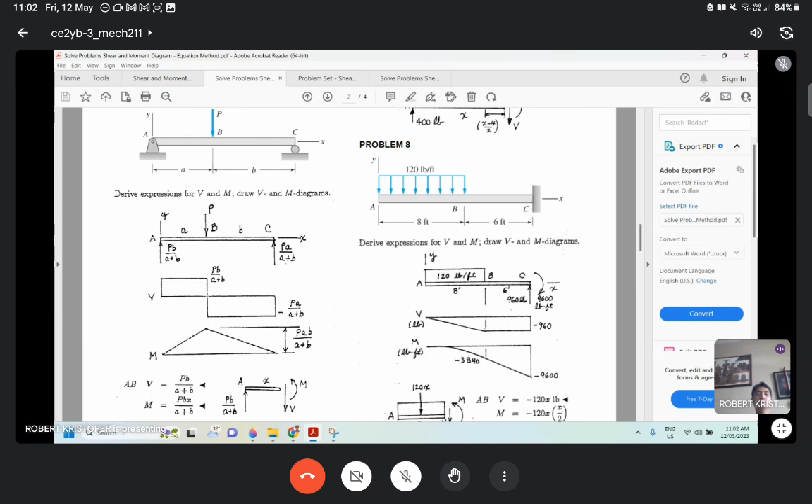Just to give you some observations. For this P value, as you can see on the moment diagram, just under the load is where the maximum moment occurs, and of course the maximum value will occur at a point wherein the zero shear occurs. So that's where the maximum moment is. Am I emphasizing this to the class? Because for the moving load topic, we only have concentrated load or unit load. Okay, is our presentation here?

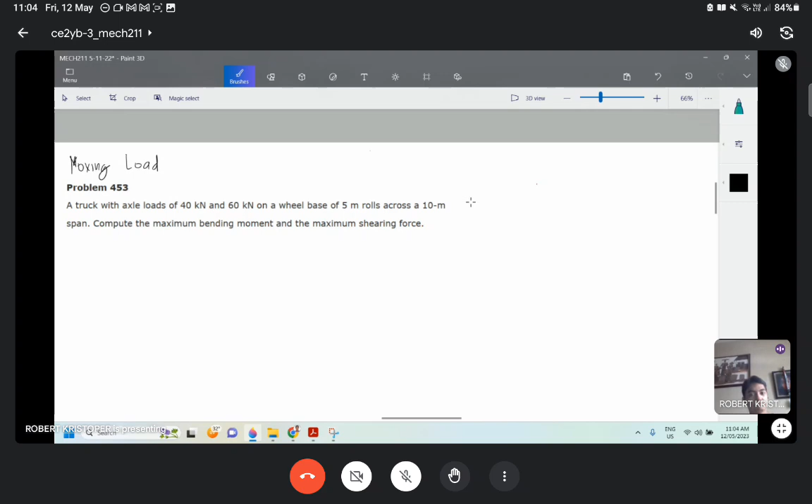Okay, it could be a car, trucks, wherein the loading of the cars or trucks are transferred. Let's say you have here a car, then of course there's the weight, whether passenger or cargo, then it is transferred on the wheels or on the axle, and then it is represented by a concentrated load, which we simply call a moving load. Because let's say that car is to pass a bridge, for example, let's say the bridge is a 20-meter span bridge. This is the beam of your bridge. Then, when the car passes, let's say this is 10 kilonewton, then 20 kilonewton in front, coming from left to right.

Okay, we don't know where the positioning of the moving load is, wherein it will produce the maximum shear and the maximum moment. Because we are taking into consideration which position of the moving load on our beam will produce maximum shear and moment. That's what we need, in order to design our structure, this beam. Upon knowing what that position is, then we can already compute for the maximum shear and moment. Okay, so what are other examples of that?

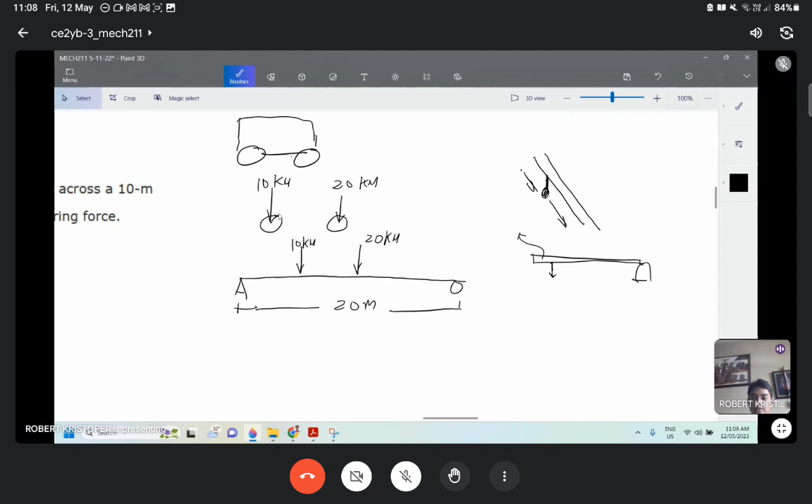Okay, what other examples of moving load are there? In order to analyze moving loads, we need to know where to place these moving loads on our beam in order to produce the maximum values for shear and moment. Because once we get the maximum shear and moment, we can design our beam. So with that introduction, let's do our computation to formally illustrate the method used when analyzing moving load.

So what's the example here? Problem 453. A truck with axle loads of 40 kilonewton and 60 kilonewton on a wheelbase of 5 meters rolls across a 10-meter span. This is the last problem for this meeting, since the other one was just illustrative. I'll teach it to you quickly. I guess this is a bridge or a similar structure. Compute the maximum bending moment and the maximum shear force.

Now with this one, let's represent the axle load - this is the moving load, or the load transferred to the wheels of the vehicle. So for the truck, that's 40 kilonewton and a 60 kilonewton axle load. Now what is the wheelbase? That is the distance between the wheels - this is 5 meters.

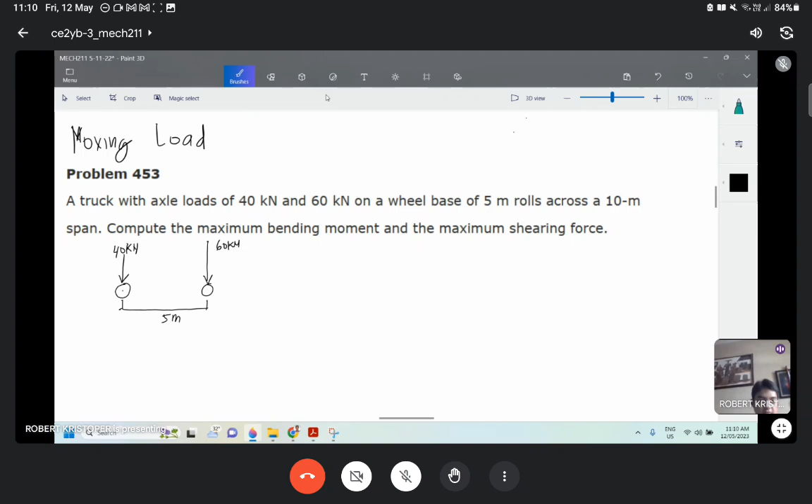Okay, the first step in analyzing moving load is that we need to locate the resultant of this moving load, so that will become our reference for positioning later on our beam, which is 10 meters. So let's go through the procedure step by step. Now what is the resultant here?

Using Varignon's theorem, remember? We can simply compute for the resultant of these two forces, then we can locate that at the center - the center of gravity of these forces, where it will act. How do we compute it? Just like a moment equation, it's the same. The resultant is equal to the summation of the components of the forces.

So this is R, then we have to compute this x distance from a certain reference point. So we take the reference as the location of the 40 kilonewton load - this is the zero point reference here of x. Now how can we compute for R? R is simply the summation of the forces, which is 60 plus 40.

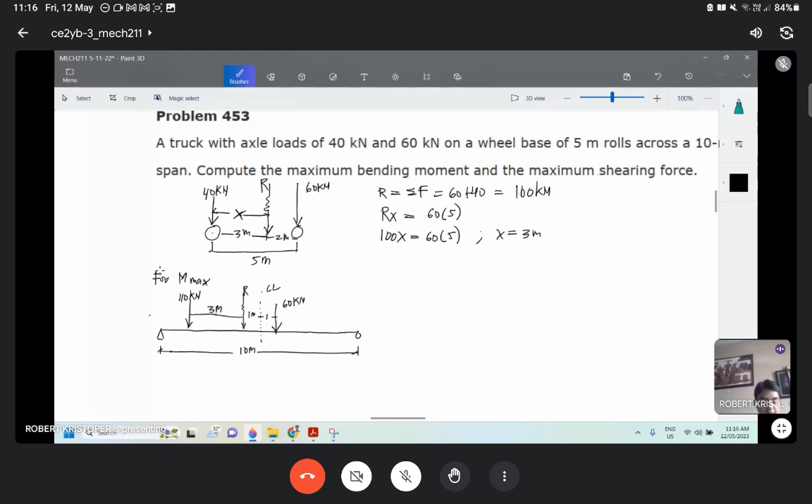Going to the 40 kilonewton load, that's 3 meters. So 3 meters, 1 meter, 1 meter, that's still 5 total distance between the 40 and 60 kilonewton loads. Let me zoom this in.

So 1 to 1 meter, and we know the distance from 40 to 60, the wheelbase, is 5 meters. And this distance here, how much is it? 4 meters.

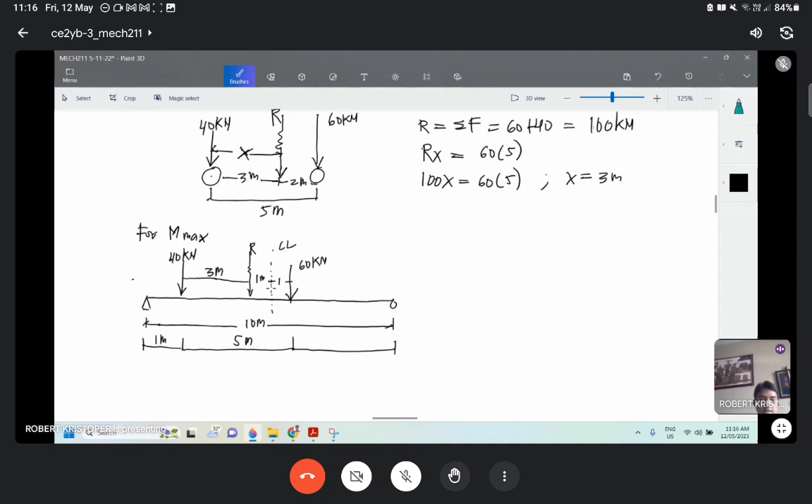Now let's place letters. Point A, then let's say this is point B. So what do we do?

To compute for the maximum moment, we solve first for the support reactions. This is Ay, then this is By for the reaction. It's simply supported, so summation of force vertical equals 0, to solve for the reaction.

Summation of force vertical equals 0, positive going upward. We can note that we can't solve an unknown with summation of force vertical alone, so let's do summation of moment.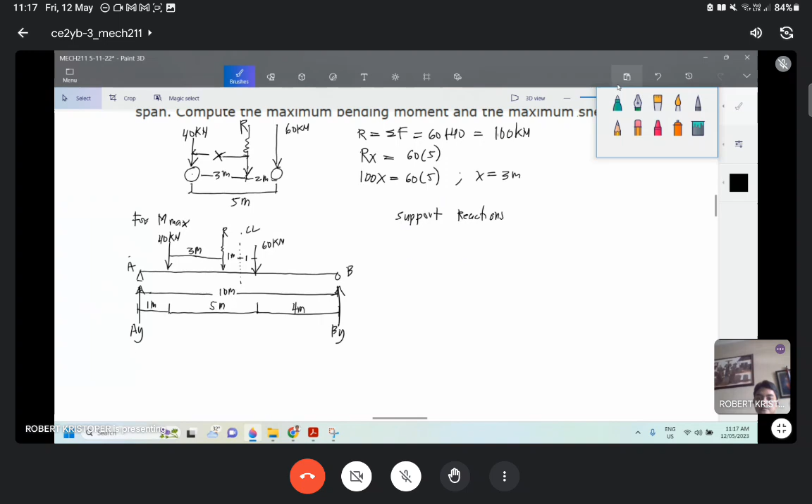Summation of moment about point A equals 0, positive clockwise. That is By negative times the moment arm of 10 meters span, plus 40 times 1, plus 60 times 6, equals 0.

Now class, this resultant, we don't include it in the equation because we were just using that resultant location in order to locate the moving loads such that it gives the maximum value of moment. So in our equation, that won't reflect.

So how much is By, class? Anyone, if you have the answer, go ahead and say it. By is what? Anyone? 40, sir. 40, correct, so 40 kilonewton.

If that's 40 kilonewton, then using summation of force vertical, we have 100 total and 40, so obviously this will be 60 kilonewton. I won't redo the summation of force vertical since that's too obvious.

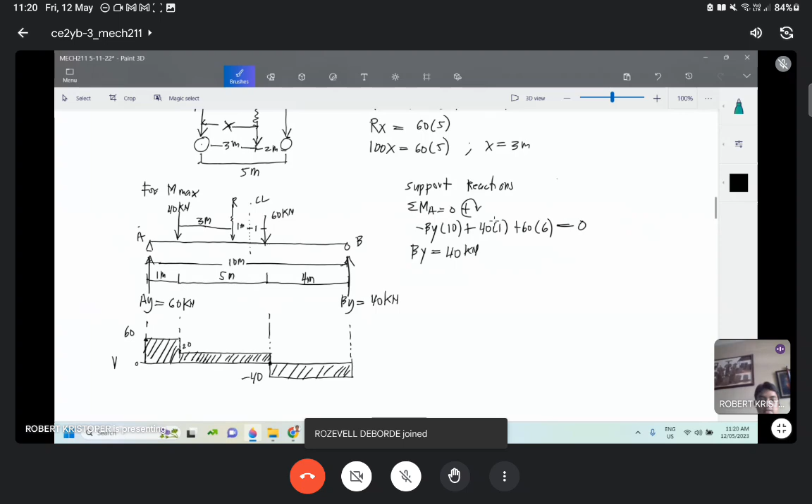Class, notice here we have a point where there's zero shear. So we're expecting that at this point that's the maximum moment, and obviously that's under the 60 kilonewton load. That's what I mentioned earlier in our investigation of the example problems.

So with that, applying the area method still. Let's label 1, 2, and 3. Area 1 is base times height, which is 1 times 60, that is 60. Area 2, base times height, that is 5 times 20, still positive, that is 100. And area 3 is base of 4 meters times negative 40, so negative 160.

This is first degree only for our graph, we don't have the moment at the support. So that is 60, from 0 to 60. Then, of course, 60 plus 100 plus this area, that is 160, straight line again. Then 160 minus area 3 brings this value back to 0. So this is the moment diagram.

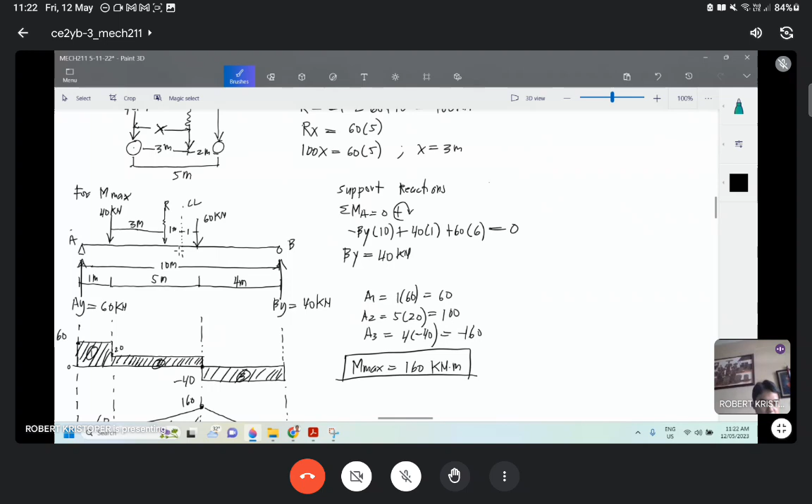Now we already know the maximum moment - this moving load of 40 kilonewton will give a maximum of 160 kilonewton-meter. But take note, at this particular position, how did we get that? We use this method: locate the moving load in this way, where the center line divides the location between the resultant and the maximum unit load.

Now for the maximum shear, this is the easiest, that's why I saved it for last. Let me put this on the side. For maximum shear, Vmax, what we do is locate the maximum unit load of the moving load at the support. So 60 kilonewton - if we locate this one at 40, it won't give maximum shear. Maximum shear will occur when the maximum unit load of the moving load is at the support.

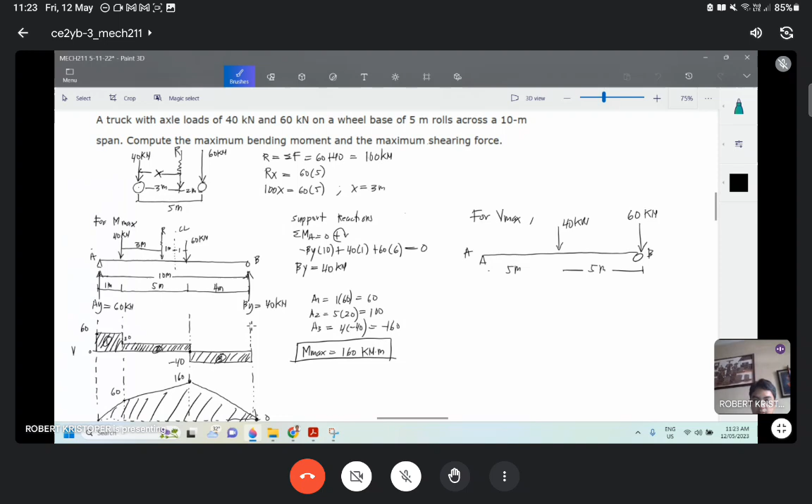So in this example, here it is: 40 kilonewton and 60 kilonewton at the support. Of course, 5 meters, and we have a 10 meter span, so 5 meters is half. Now we are ready to compute for the reaction. So this is AY and this is BY.

Summation of moment about point A equals 0, positive clockwise. So that will be negative BY times 10 plus 40 times 5 plus 60 times 10 equals 0. Can you give me BY here, the reaction at B vertical, how much is this? This is the last one since we only get maximum shear and moment. 80. Yes, correct, BY is 80 kilonewton.

Now class, it's always like this - the reaction at the support is where the maximum unit load of the moving load is located. This already equates to Vmax. Let's verify this case - but just for the purpose of completing the computation, summation of vertical forces equals 0, positive upward, AY will be 100 minus 80, so that's 20 kilonewton. So BY is 80 kilonewton and AY is 20 kilonewton.

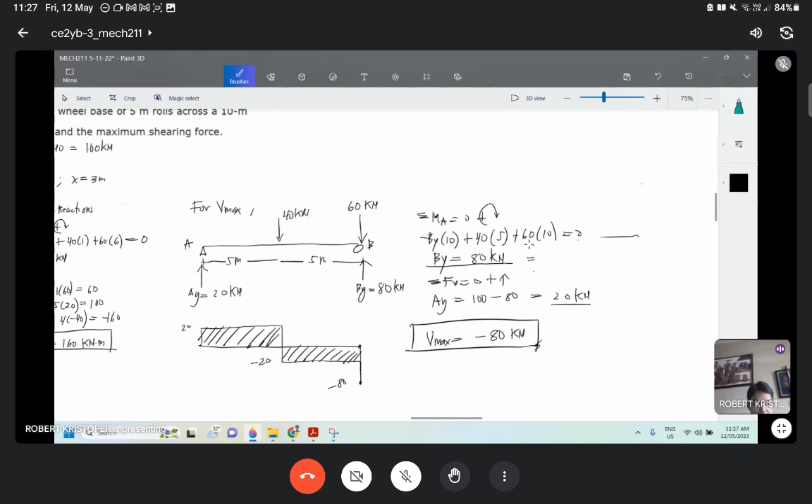Now we are done with my last example to compute, but I have to show you this illustration of moving loads. The same procedure applies if, let's say, there are three wheels now - earlier we only had two, or three, even four or five works the same way. Let me just show you here, there's a solution for this. I'll be compiling this one, don't worry.

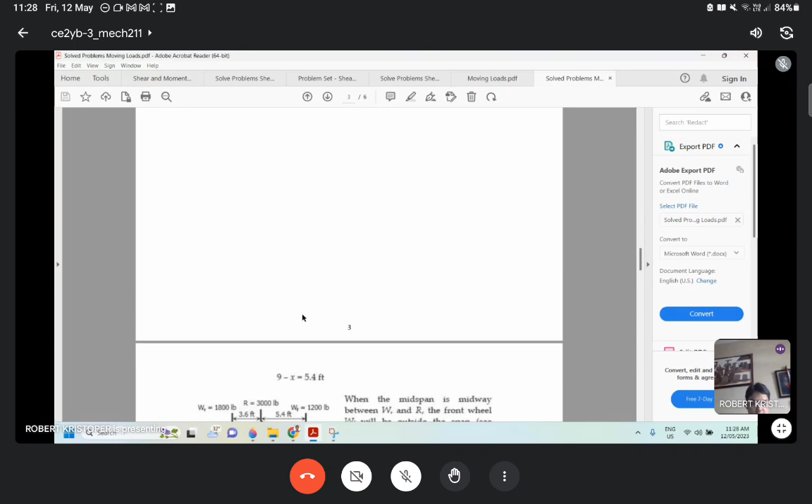Okay, yung tatlo yung loading. Class, are you with me with this last problem just to illustrate lang? Can I confirm? Before we proceed, so we can dismiss already.

Anyone? Can you confirm this problem, 4,5,6? Yes po. Okay, so ito siya class. What do we have here? We have 3 axle loads, 3 wheel loads na roll as a unit across a 44 feet span.

Okay, this is the span ng bridge or ng beam. So pag walang sinabi, it is always simply supported. Typical bridges naman is simply supported yung ating support condition. Now we have 3 loads here: 4,000, 8,000, and 6,000. Naka-indicate naman yung distances in between: 9 feet and 18 feet.

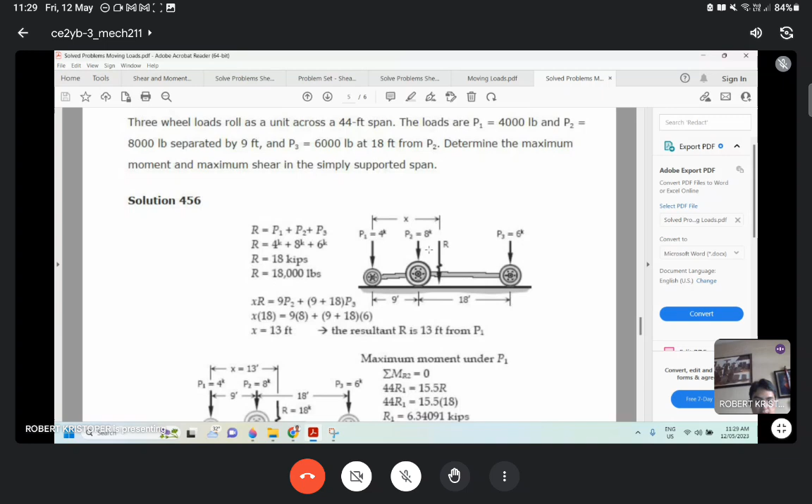Now these are the loading: 4,000 pounds or 4 kips, 8,000 pounds or 8 kips, and 6 kips. Then again, the method ganun pa rin. You need to locate the resultant R. So upon locating the resultant R, R is still summation lang ng forces, diba? Then locate the resultant R, take the moment center for your moment arm, moment computation.

Itong typically laging sa left naman, so to compute for distance x, it's up to you kung kaliwa or kanan, pero typically kaliwa naman. Then upon solving the resultant and also the location ng resultant, yun naman importante dito yung location ng resultant kasi we neglect the magnitude of R after we located the moving load such that it will give the maximum value ng moment.

So with this one, anong na-compute na value ng x, 13 feet? So kung 13 yan, yung kabilang side, this is 27 minus 13, so 14. Tama? So 27 minus 13 is 14.

So ang gagawin niya is that you need to locate itong moving loads na to, itong tatlo, such that it will produce the maximum moment. Ang gagawin natin is that yung center line, hahatiin yan yung resultant and yung maximum loading sa moving load. Ano ba yung maximum dito? Di ba itong 8 kips, hindi naman yung 6. So 8. So ilalocate natin itong R and 8 kips wherein mahati yan by the center line.

Ito class example sa module, ang ginawa ay chinek na lahat. Yung una, itong pinalocate nito sa unang computation, yung center line hinati itong resultant and P1 or 4 kips - ito yung magnitude ng moment. Yung second, yung ating method wherein hati ng center line ng beam yung resultant and the maximum loading na 8 kips. So in this one, ito yung value ng magnitude ng moment, 127.

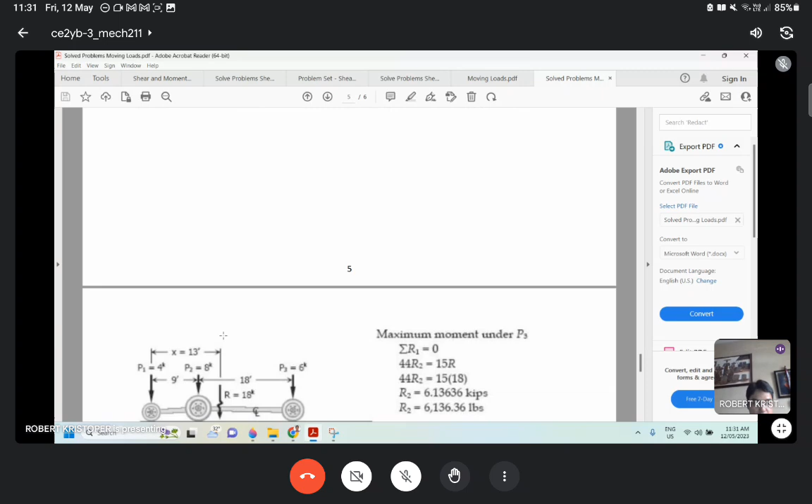Okay, compared to 98, di ba? Mas malaki ito. Then we can verify the case lastly with this one. Ang ginawa is that ito namang 6 kips loading and the resultant yung sinubdivide, in terms of location, the center line ng beam. And the computed magnitude is 92,000. Still mas larger itong maximum moment computed.

Kapag ang positioning is such that ito yung resultant and ito yung maximum unit load ng moving load at the center line. So ito class, I'm good with this solution, kung ito lang yung ginawa ninyo kahit di na itong other solution. Kasi understandable naman na on our method, the maximum moment will occur with this location, pinati ng center line as per position itong resultant and the maximum unit load ng 8 kips. Okay, so that will do.

Okay, and then the maximum shear, ang gagawin nyo lang is that, syempre, ang maximum natin na load is 8 kips, di ba? So kung ilalagay mo yung 8 kips sa support, malalaglag yung 6 kips, di ba? So you need to locate na yung loading is nasa support. Yung 4 kips yung nasa sa support and mas malapit itong 8 kips sa support. Kasi yung isang scenario is that pwede na ang ilagay mo sa support itong 6 kips. But this time around, mas malayo kasi sa support yung 8 kips, yung mas heavier load, so mas magiging malaking reaction at the support.